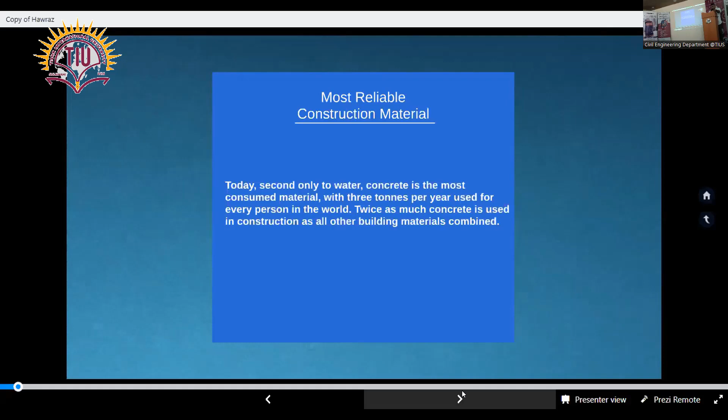This material is a versatile material. Apart from that, you can design different types of concrete. This material can be constructed in different shapes because it's cast on site. Today's topic is not about the pros of concrete, but more we will focus on the weaknesses of concrete. If you just go to the weakness. Yeah.

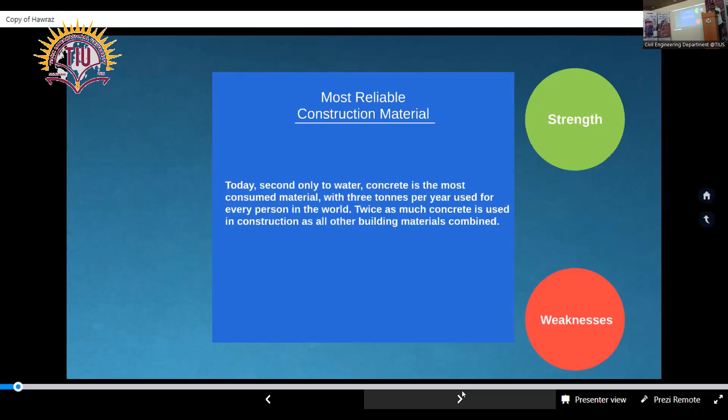Some people believe that concrete can do everything, but others have a different belief. So let's see. You know that the tensile strength of concrete is not as high as its compressive strength. We all know that the tensile strength of concrete is only 1/10 of its compressive strength. That's why steel bars are embedded in concrete to increase tensile resistance. Apart from the tensile strength,

another topic of concrete is whether this material can serve its design life or not in real life. Many people think that concrete has a good lifetime, but others believe that concrete will not always perform to its design life. And the situation and the condition where the concrete is put describes the lifespan of concrete. So, move to the next slide.

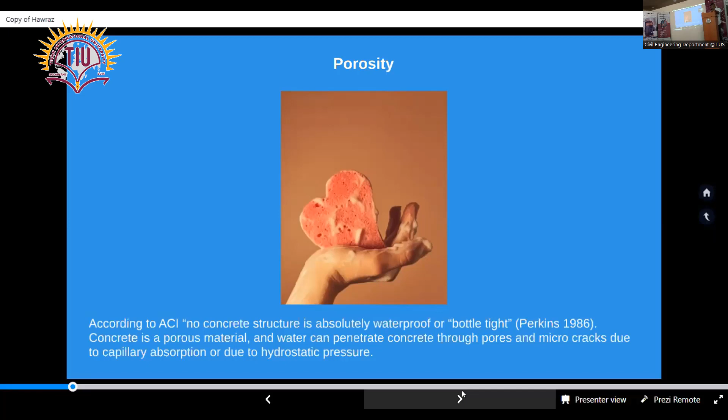Yeah, this material, which can be seen as a very compact and dense material, actually is not that. Concrete is a porous material. It has a structure more like a sponge, and concrete absorbs water and gases, and that's why, according to the American Concrete Institute, no concrete is absolutely waterproof or bottle tight. This opens a new perspective regarding the durability of concrete.

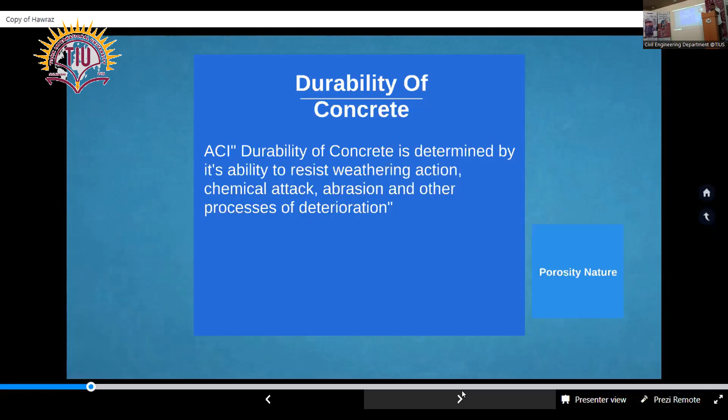You know, when concrete absorbs water or gases, it will face many issues, which is known as volume change. This could be due to water absorbed causing freeze and thaw cycles, or water entering concrete and making problems of corrosion, which in turn results in more cracking of concrete. So move to the next slide.

So right now, we all know that this material is a porous material and absorbs water and gases, and people have known this for so long. So they're thinking about how to protect this material and give it more lifespan. According to ACI code, the transport of deleterious material within hardened concrete has a great effect on the durability of concrete.

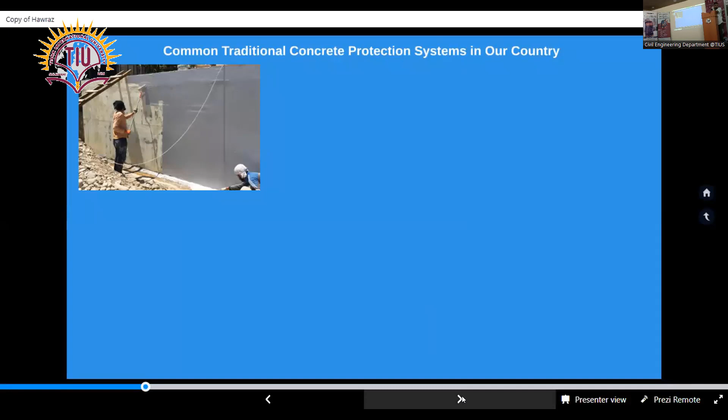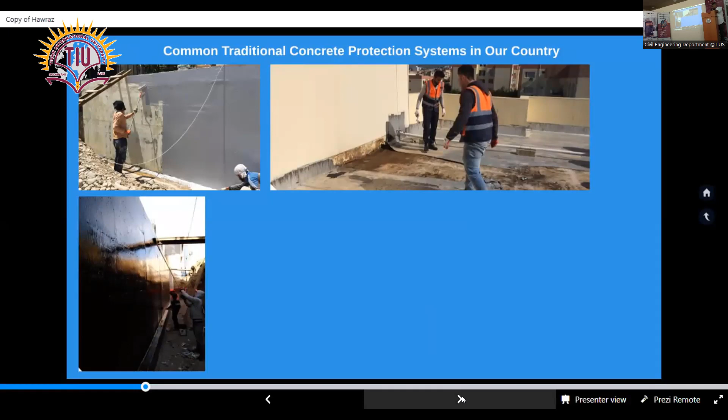And since it will be backfilled and there will be the risk of groundwater on the concrete wall, these people are trying to paint the wall with some kind of polyurethane waterproofing membrane. Next slide. Here, this is a sheet membrane system you are all familiar with, especially used for roofs. Next one. This is the basement of a commercial building. The people are trying to coat it with a bitumen extended polyurethane membrane.

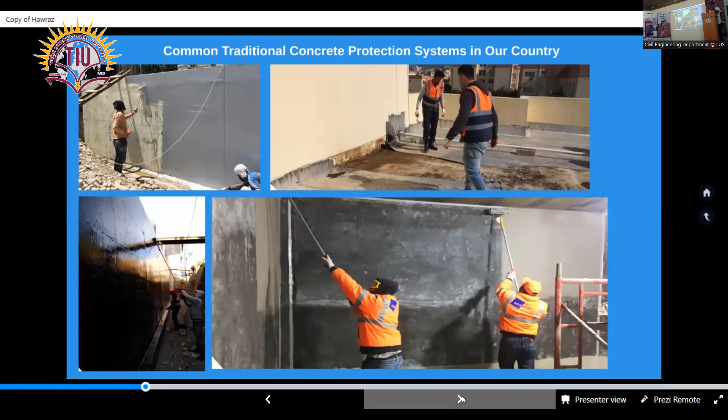And this is the interior of a water tank. They are trying to coat the concrete with a cementitious waterproofing product. By seeing these photos, we all confirm that today in Iraq or everywhere in the world, no concrete is left to serve on its own in critical environments. As it's clear from the photos, many different methods and different materials are applied to concrete. That's just to protect the concrete.

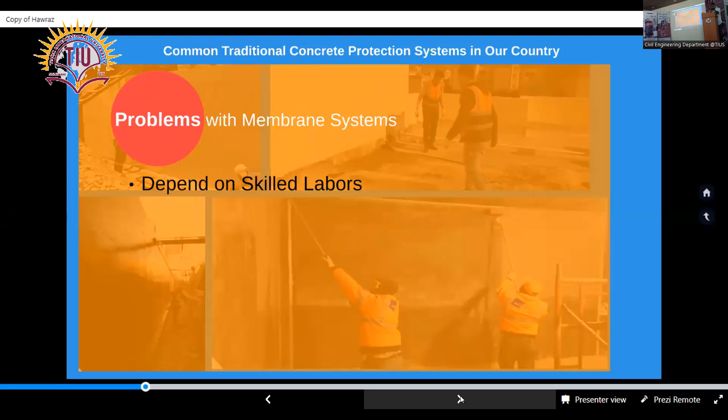Those products that you see, we will be focusing on their problems. Okay. All those materials that we showed in the previous slide that consist of different products, they have some weaknesses. Let me show you. First of all, any product like polyurethane paints or sheet membranes or cement-based products, they all depend on skilled laborers. I mean, if you have a concrete or a basement or a water tank and you try to protect the concrete on its own, you cannot unless you have skilled labor.

And these products usually cannot be applied to concrete every time. During rainy weather, you cannot use these products. And when the temperatures are above 35 degrees, you cannot apply these products due to blistering. And they all rely on minimum thicknesses. So that's why you have to control the thickness of the membrane which is applied to concrete.

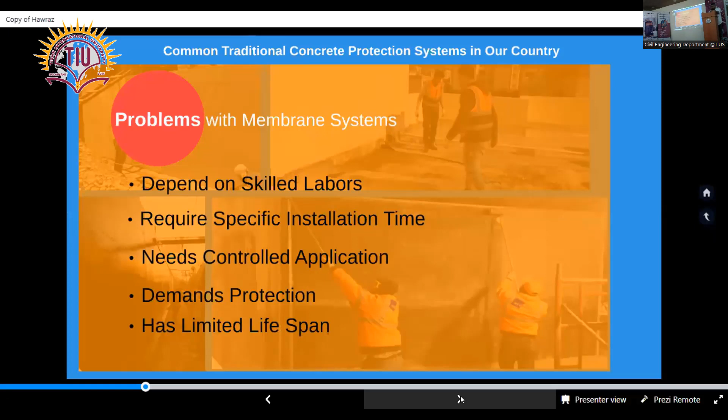And all of these products which are applied to concrete to protect the concrete, they need protection as well. And these products are not serving for the lifetime of the concrete, but they will face degradation. So let's see what we have.

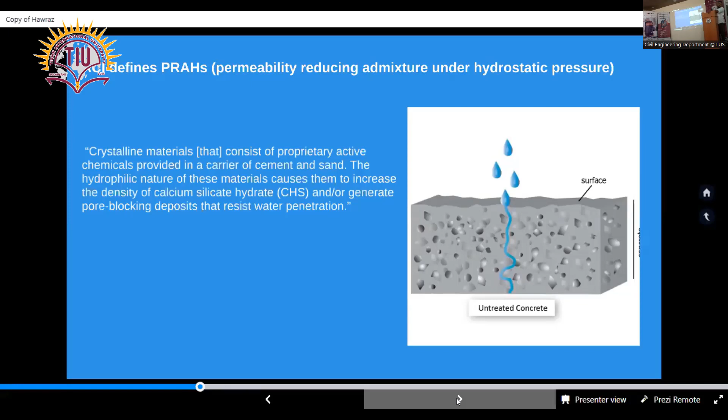Will you move? Okay. To show the effect of crystalline, we have a test which is called DIN 1048-5, in which, as shown in the photo, cubes of concrete are exposed to water pressure, usually for up to 72 hours. After 72 hours, the cubes are broken apart, and the depths of water penetration are recorded. So according to ACI, reduction in penetration of water up to 90% has been recorded by modifying the property of concrete and making the concrete self-defending.

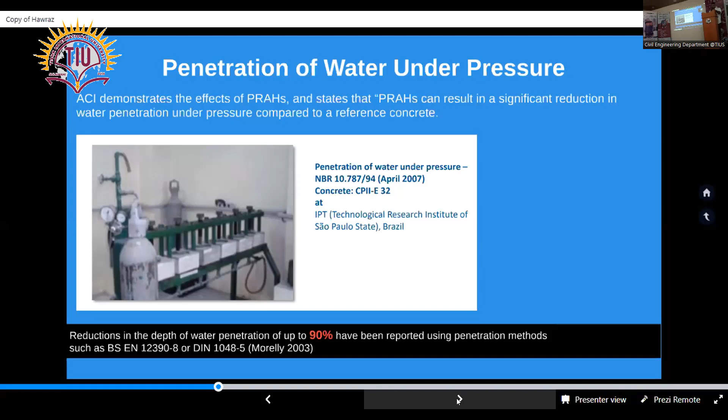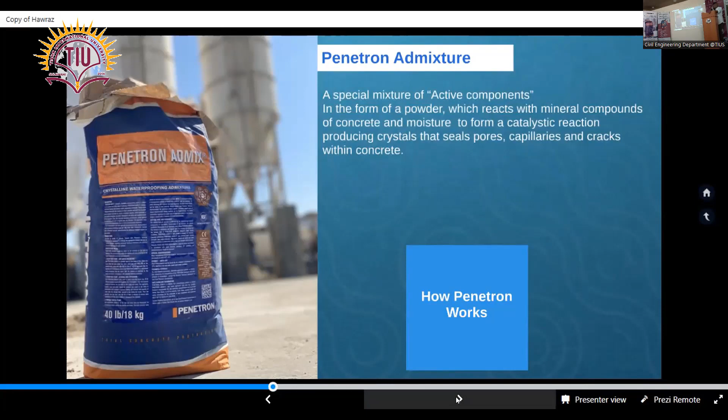So what the Penetron Admix does: Penetron Admix is based on the article of the ACI code, and it's a crystalline additive which can be added to concrete to modify its property and change its nature from a porous permeable membrane to a non-porous self-resisting material. Now let's see how Penetron works inside concrete. Play.

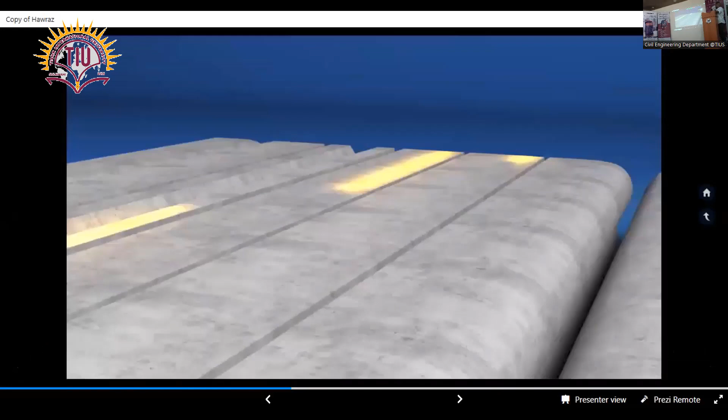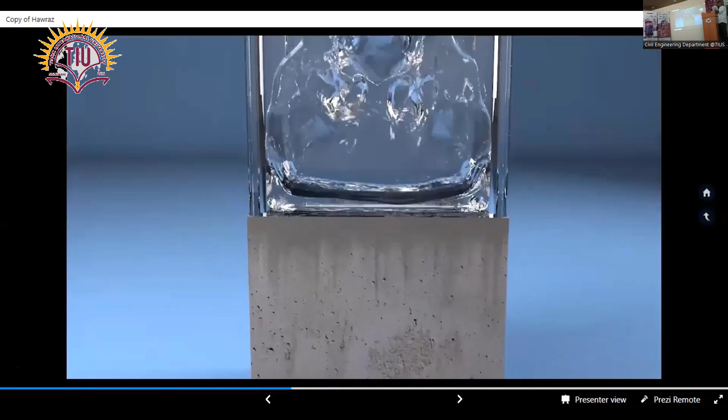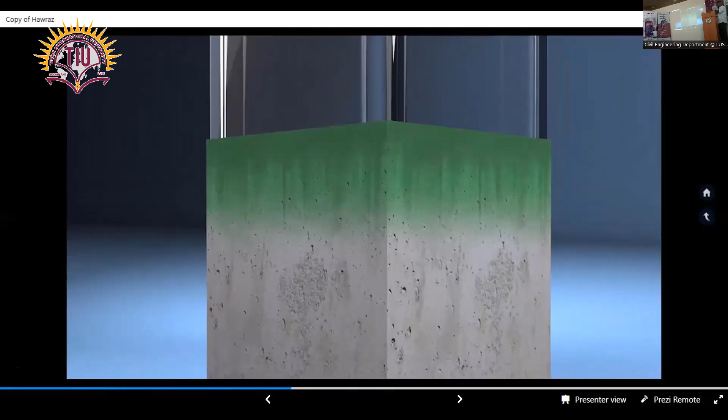Concrete has a multitude of micro cracks, pores, and capillary tracts through which water enters the concrete. When Penetron is applied to the concrete, the structure will gradually dry out, even when facing high hydrostatic pressure. Let's take a closer look at how this works. Water passes through the capillary tracts and micro cracks in the concrete. These pores have a width between 0.1 millimeters and 0.05 millimeters. When Penetron products are applied to the concrete, the chemical reaction that follows causes these voids and cracks to be filled with insoluble crystals. Water is unable to pass through these crystal formations, and as a result, the concrete becomes waterproof.

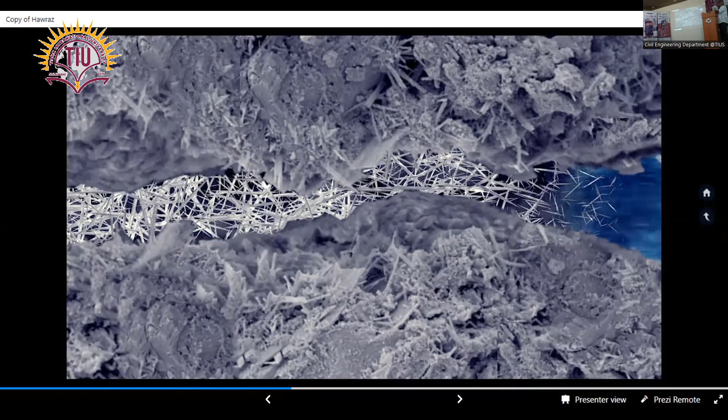The ability of Penetron products to penetrate deep into the concrete structure, even when applied from the negative side and against high hydrostatic pressure, is the result of a complex chemical reaction involving osmosis, dry particle reactions, and Brownian movement. Once inside the concrete, the Penetron components react with water, calcium hydroxide, and aluminum, as well as various other metal oxides and salts contained in the concrete, and moving through the capillaries. The crystalline formation that ensues prevents water from moving through, but still allows air to pass, thus avoiding vapor pressure building up inside the concrete.

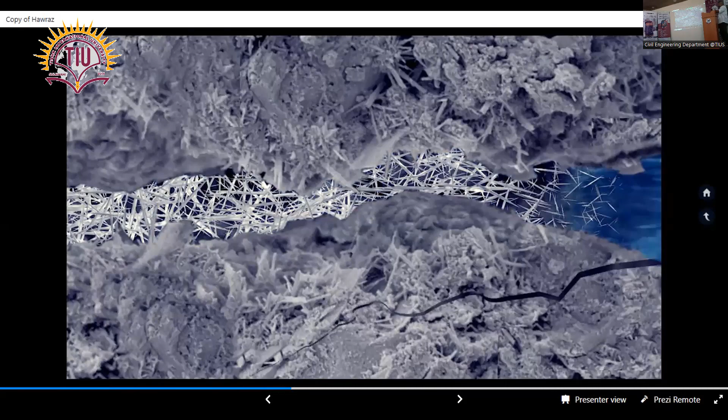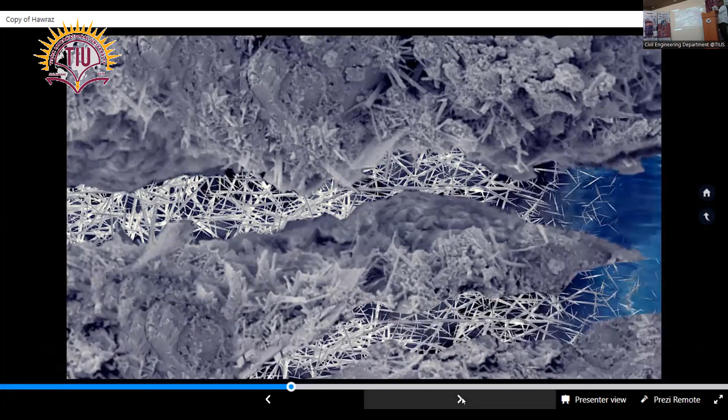If new cracks appear throughout the life of the concrete, Penetron crystals will appear in these cracks as well, preventing water from finding new ways to get through. No more water is present inside the crack. The Penetron crystals lie dormant, but as soon as water reappears, crystalline growth is resumed. In addition to the protection of the concrete against water penetration and resulting damage, Penetron protects the concrete against attack by various chemicals, acids, industrial waste, and corrosive groundwater, as well as seawater, and improves the frost resistance and strength of the concrete.

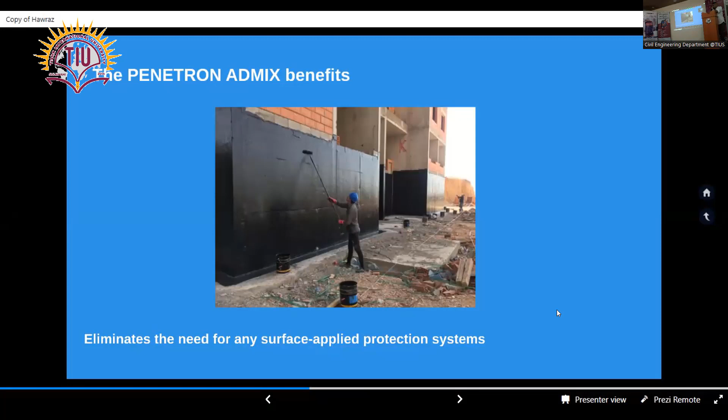As you see, this photo is from a project in Suleimania. The basement walls are protected before backfilling. That's because not durable concrete is used, but normal concrete is used. If we modify the property of concrete by adding Penetron Admix, we will not need to apply such materials to protect the concrete. Move to next slide.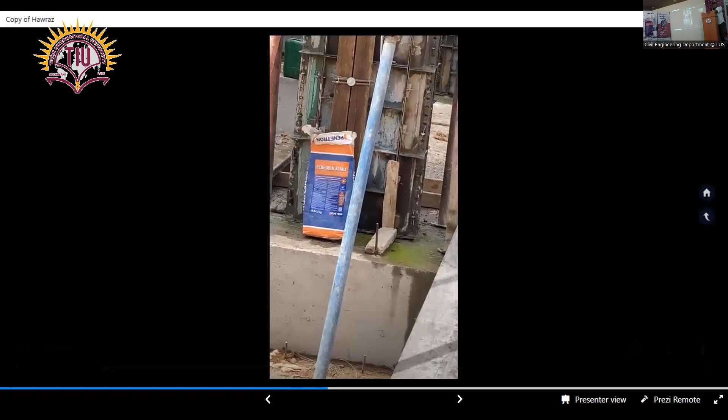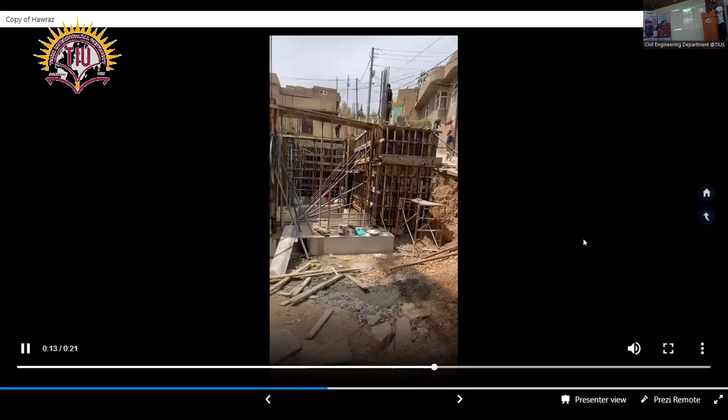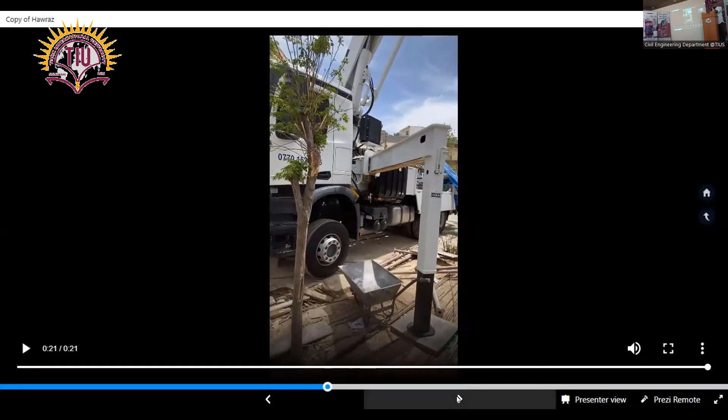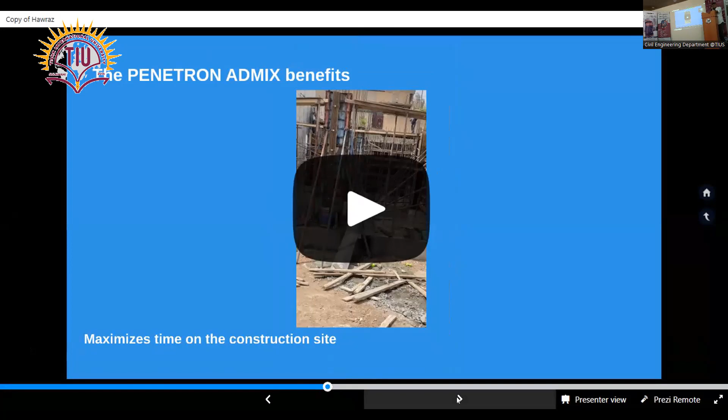This photo is actually from a project inside Suleimania. The client added the Penetron Admix on the day of concreting. As you see, we have the concrete truck. Actually, that was just to show that by using the admix on the day of concreting, we save a lot of time, which is dedicated to conventional systems.

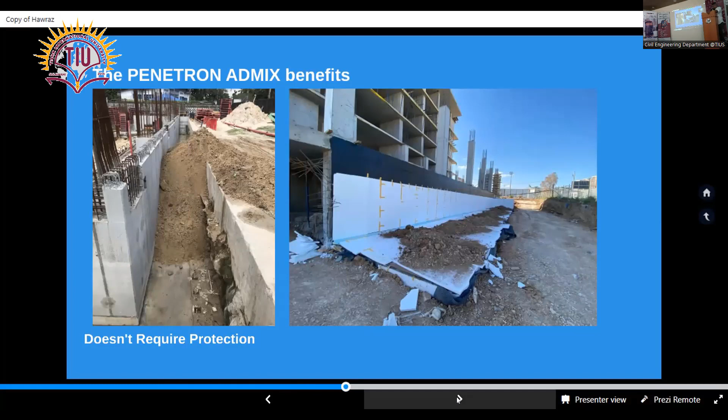Here's another photo showing differences between working with a conventional system or adding the Penetron Admix. The photo on the right shows the basement of a building, which is also in Suleimania. After applying the protection layer, they provided the polyethylene to protect the membrane, the waterproofing membrane. However, when Penetron Admix is used inside concrete, you don't need to provide extra protection, which means you will save time and money as well.

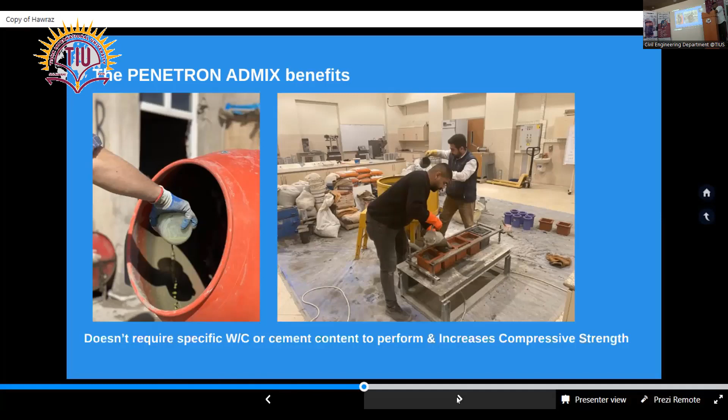This is due to the fact that once inside the concrete, the Penetron Admix starts to grow crystals, and all the capillaries and microcracks will be filled with calcium silicate crystals, and we will have a more compact and denser concrete, as is obvious from the 90 days test.

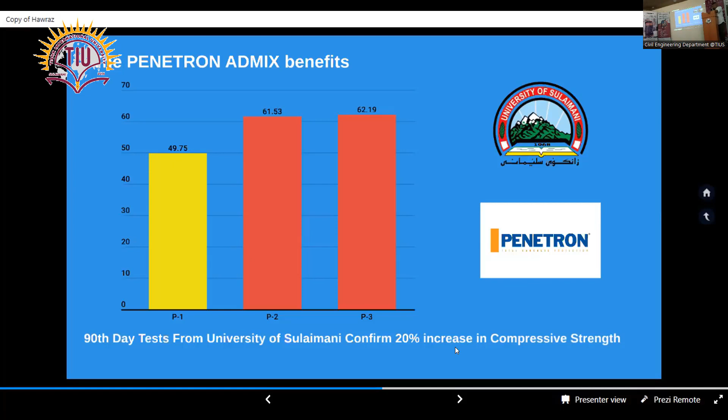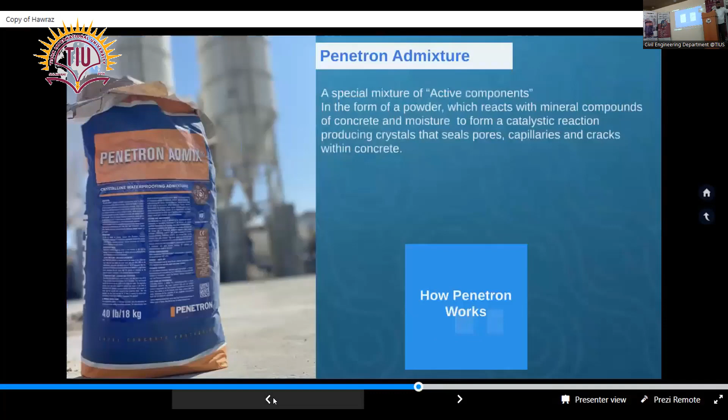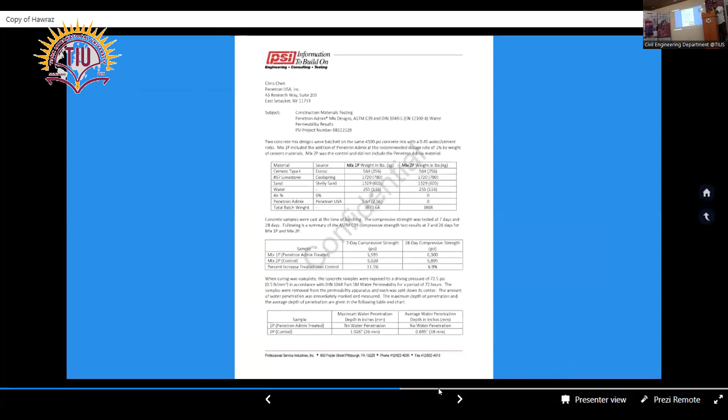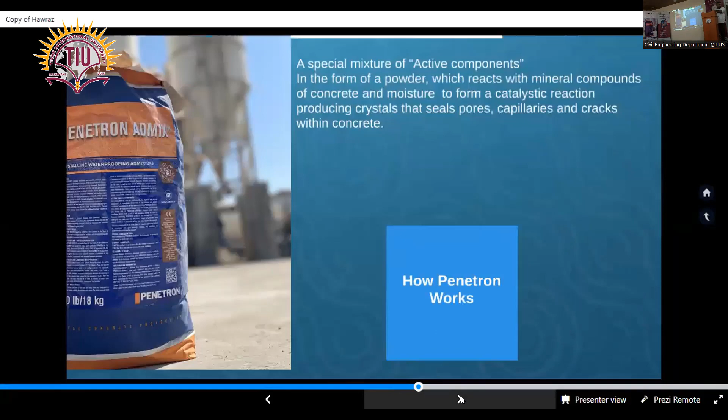The ACI code clearly states that the permeability reducing admixture can be incorporated into any concrete. However, usually it is incorporated into concrete which is exposed to a critical environment. Critical environments we have in the basements of buildings, in water tanks; even concrete slabs exposed to weather are considered a critical environment. Penetron admixtures are used to eliminate the problems of water migration, leakage, freeze and thawing, corrosion, and carbonation.

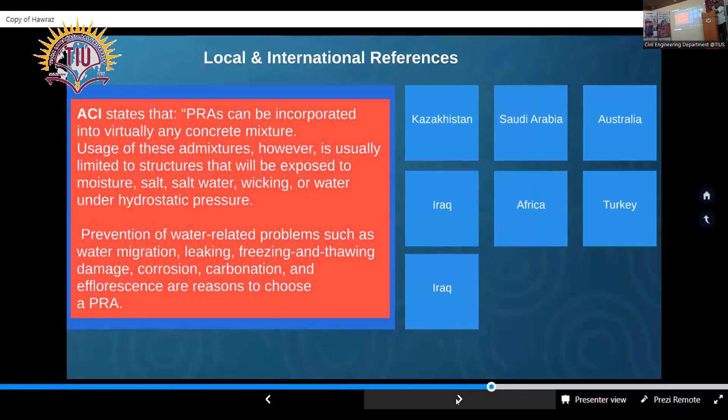Actually, we have many references around the world and in Iraq, but I could only prepare like 5-6 samples. Here it's a wastewater treatment plant. The concrete is treated with Penetron Admix. In this building in Saudi Arabia, the Penetron Admix was added to the concrete for the protection of the foundation slab, the basement, and the storage tanks.